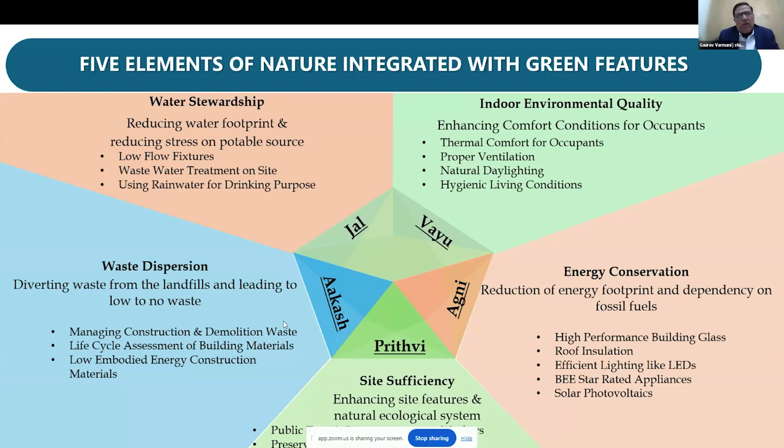When we start designing any industrial project, the first and foremost thing that comes to mind is site selection and planning. That is point zero, where the sustainability initiatives start happening.

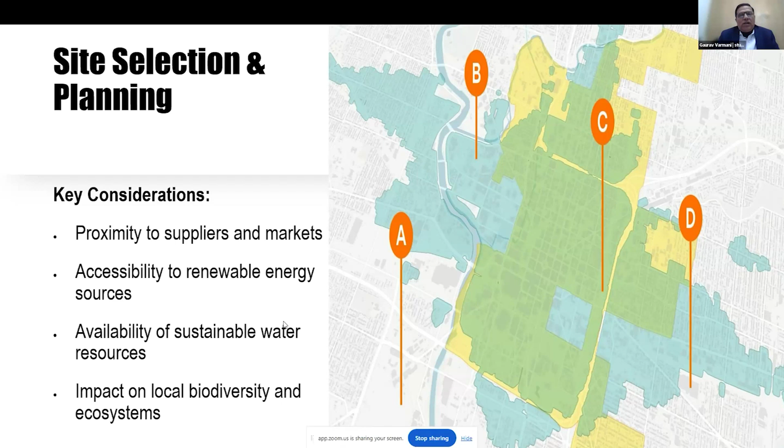Proximity to suppliers and markets is an important criteria. Accessibility to renewable energy sources is very important while selecting a site, along with availability of sustainable water resources, because no industry can survive without proper water, and impact on local biodiversity and the ecosystems. This is becoming more and more important as we go by the day.

When we talk of proximity to suppliers, the whole effort is towards reducing transport emissions, enhancing supply chain efficiencies, and minimizing logistical cost. Each and every step taken in this direction actually helps us create a better environment and a more sustainable building.

In certain geographical areas of our country, wind plays a major role, and wind turbines help us out a lot, along with various other renewable energy installations at various platforms. Grid connectivity and energy storage solutions also blend in well to give us a final outcome at the desired, optimized levels in terms of sustainability.

Talking of water resources, in the initial stage itself we need to assess the local water availability as well as quality, because that becomes a primary selection criteria for any location where an industry is planned to be built. The rainwater harvesting and recycling potential also needs to be assessed during site selection.

When we talk of eco-friendly materials, there are various examples of sustainable materials in the automobile manufacturing sector itself, since we focus more on automobile manufacturing spaces. The benefits of using recycled content also needs to be understood - only then will you be able to appreciate and use these materials.

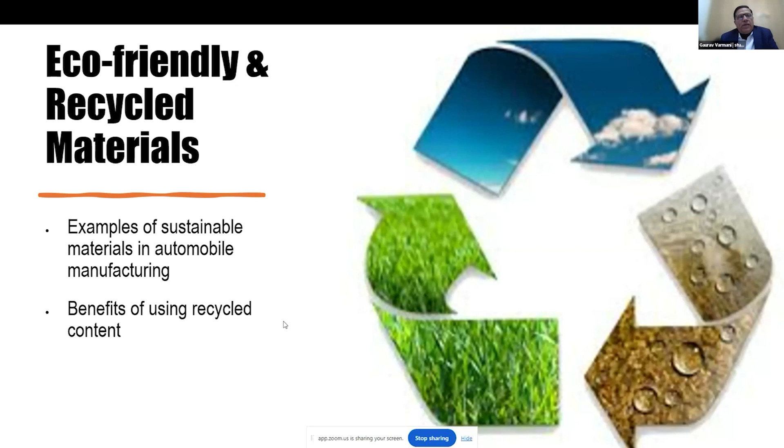Sourcing from sustainable suppliers becomes a criteria, because when you are sourcing from the right source, of course, the output will also be correct.

When we talk of sustainable procurement and local and recycled material, we could go in for fly ash bricks, use of PPC for concrete and masonry works, and low finish granite. Don't put in too much extensive energy to create polished looks - even low finish granite can complete the purpose and look aesthetically nice as well.

Aerated blocks is another option. As we grow fast, we have to look at prefabricated construction technologies and materials, which are manufactured and shipped from various factory locations to the construction site, so the challenges of on-site pollution are also reduced drastically.

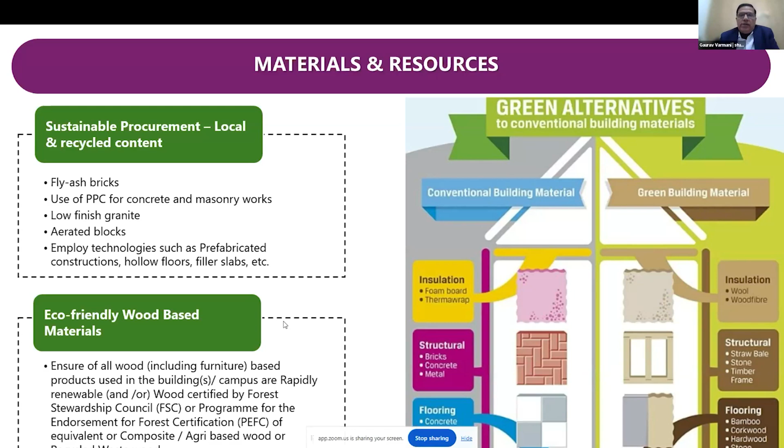As architects, our design should be more committed to achieving results through passive design strategies, rather than depending on mechanical means and equipment that will come in during the operational life cycle of the building.

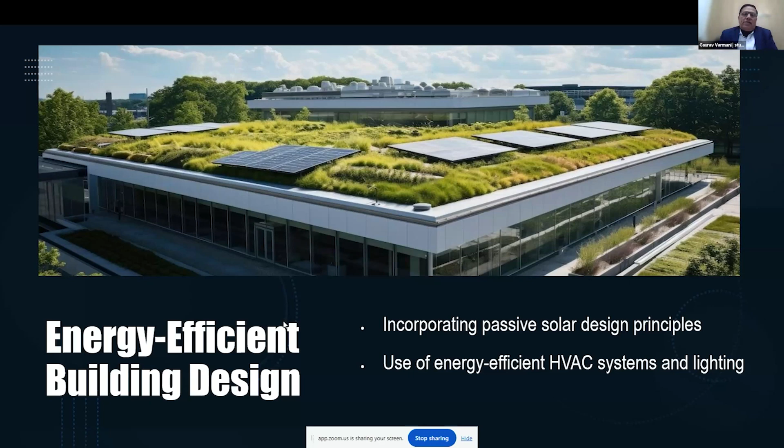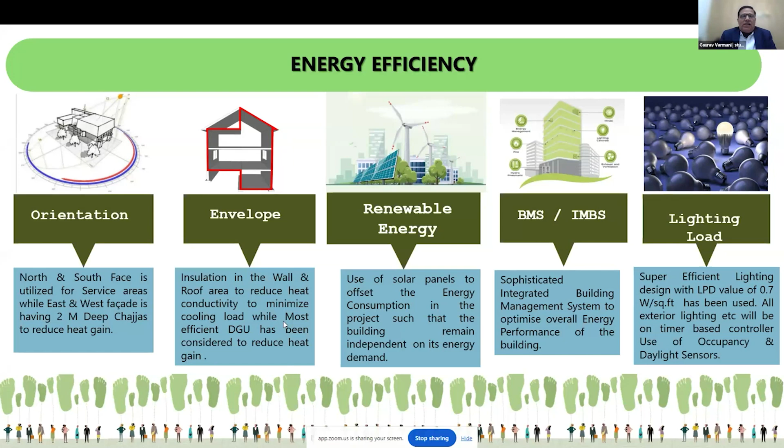In terms of industries and various other commercial and institutional buildings that we do today, all these parameters in terms of equipment installed, which is the HVAC equipment, the pumps, motors, lighting systems, everything needs to be measured and put to the most optimal numbers that it has been designed for.

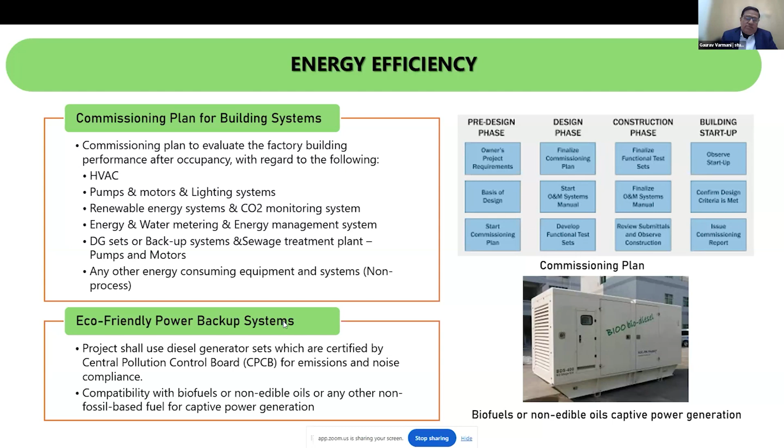Various energy monitoring meters need to be installed. The CPCB norms today are playing an important role, and we have a lot of pollution issues in our Delhi NCR region, which need to be tackled and addressed year on year.

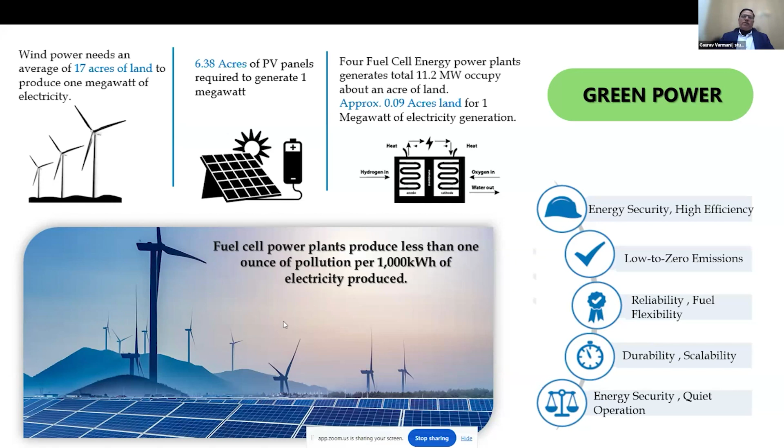Water efficient plumbing fixtures with low flow rate fixtures are a basic criteria which are now going into most of our buildings, and what you must also be designing.

The sustainable landscape design plays an important role in terms of selection of the right species which are drought tolerant and native species of those regions, which can help in a great way in reducing the water consumption of a particular project. ETPs, STPs, and major recycling of water, because water is being consumed in a big way during construction, designing phase, as well as during occupancy. So in all these phases we need to address the water in a very focused manner.

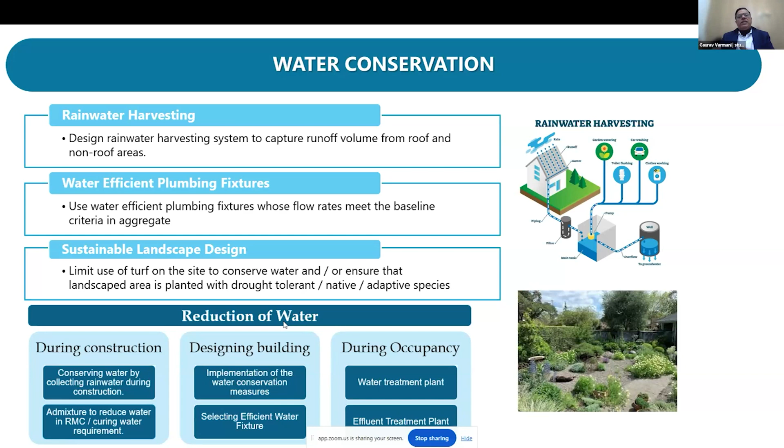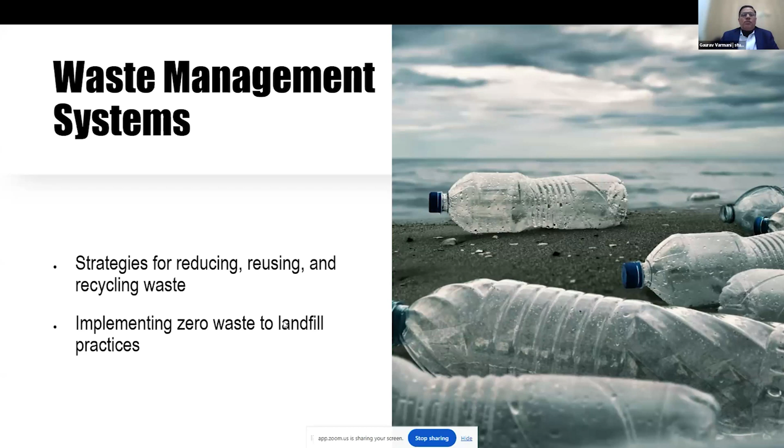Water treatment plants, water metering—again, what is metered is going to give you results. Waste management is a very important area to be addressed. Strategies for reducing, reusing, and recycling waste need to be understood and planned from day zero, and implementing zero waste to landfill practices comes into play. Construction waste management is what we are responsible for from day zero, and we need to address how to handle the construction waste and how to treat the organic waste post occupancy.

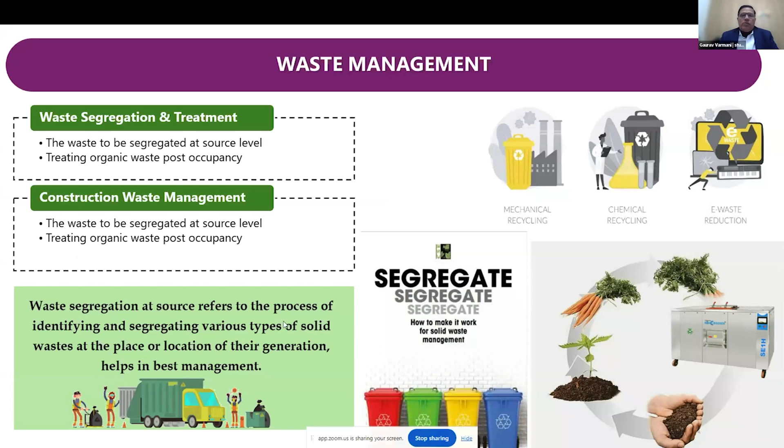Approach towards a green factory, and how we need to address the indoor environment quality. So we implement a no smoking policy, and the number of air changes that go into the space keep the space healthy for our occupants, all the workers, and their efficiency also improves the moment we are able to ventilate the spaces by natural means.

So again, the design strategies play a very important role, because factories are a very cost conscious business environment where we cannot depend too much on mechanical ventilation, and neither is air conditioning recommended, nor can the users afford it in a country like India today.

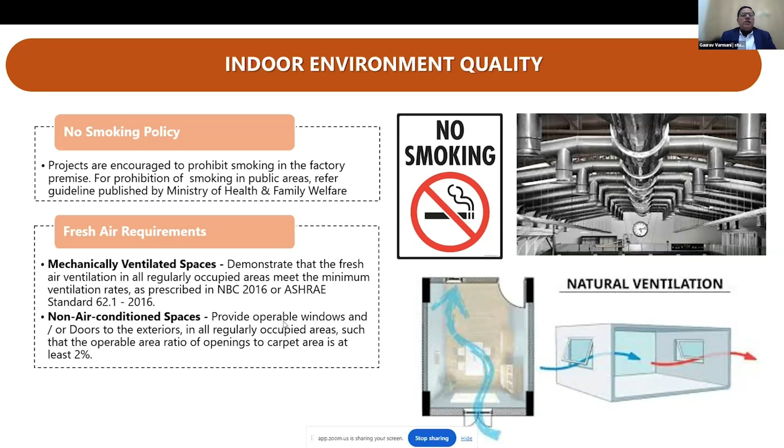So we need to focus more on natural ventilation systems and processes, by implementing louvers, by partially opening windows, so that we can control the dust and we can control the indoor air quality of the space. Because there are certain fumes also which are generated, so all that needs to be balanced, and a proper mix of the ventilation system needs to be maintained.

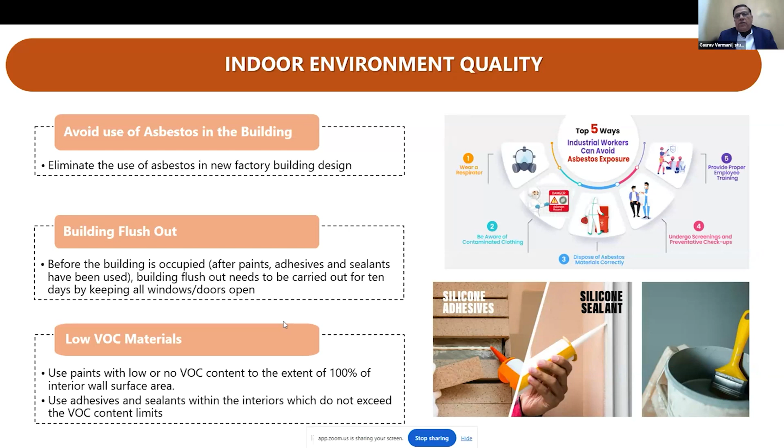There are various other strategies like building flush out before occupancy, finding low VOC materials as far as possible to be used. Asbestos, of course, is gone now—we are not using any more asbestos in our projects. Eco-friendly housekeeping chemicals, resource efficiency—when we talk of industries...

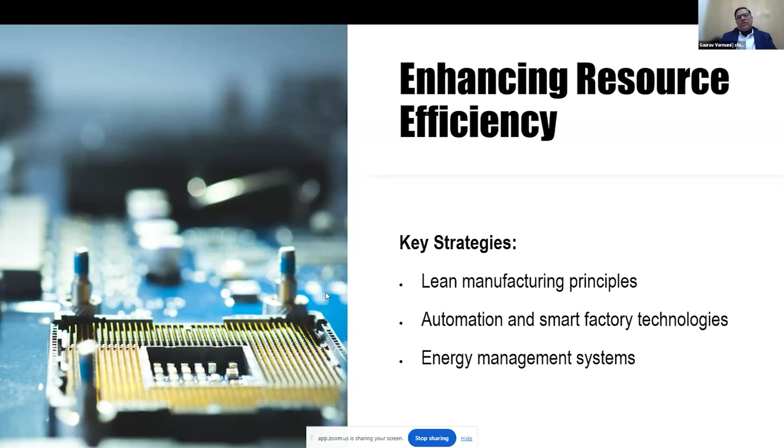We are already talking of lean manufacturing and industry 4.0, where human dependency is less and automation systems are getting into place, and energy management systems play a major role in these areas. So lean manufacturing principles could be in terms of design, in terms of various ERP softwares and the automations that we bring into the built environment to enhance productivity and sustainability aspects.

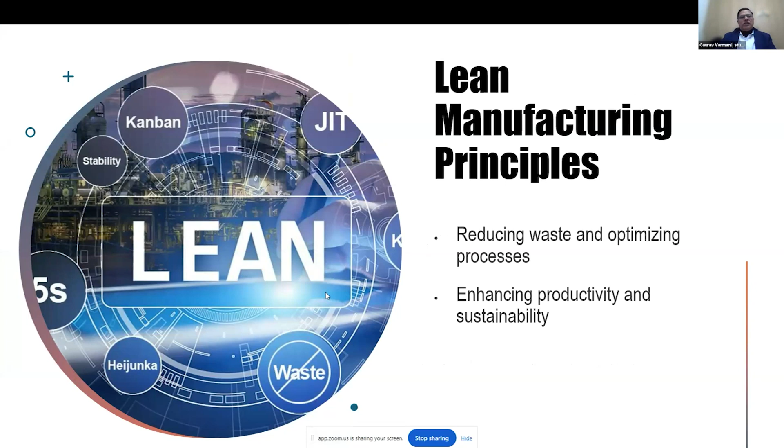So automation, as I just talked about—we can use IoTs and AIs in our space energy management systems, which are guided by the ISO principles, are into use.

We are in this space where, as the present generation, we have the responsibility to act as a trustee of the rich natural wealth for future generations. The issue is not merely about climate change, it's about climate justice for all.